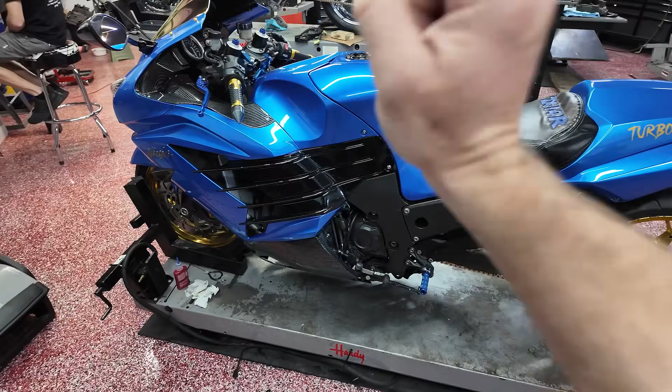We'll show you guys what it's sitting at currently, and that way we can show you guys the before and after, because again, he's already got some work done to the bike. I believe it's already been tuned. I don't know, I think he's got a Power Commander in there. I'll confirm all of this when we get it on the dyno and actually run through it. But right now, this is the bike, the way it's sitting, and I just wanted to show you guys in its depth so that when we get plugging away on it, when we finish it, you guys can get an overall view of how it's going to look whenever it's finished.

We are going to see what this factory fuel system can do. We're going to kind of push it to its limits, kind of see what it can do. Now, this guy's not looking for all the power in the world. He's already admitted to us, he doesn't want anything really crazy. This is more of an around town bike. He just wants a turbo street bike that's just fun to drive around. He's an older gentleman, it's not like he's 25 years old and he's trying to prove everything to the world.

So we have the ZX14R on the dyno. We're getting ready to baseline it, and we noticed a few things as we were just warming up the bike. He's got an active oil leak on the left-hand side, right by the header. We noticed a little bit of smoke coming out while we were warming it up, and we went over there. It's not a major ordeal. It looks like it's going to be from either the valve cover or one of the spark plug seals where the pair valve and the spark plug, there's a seal that goes in there, kind of like another gasket, and basically that looks like it's actively leaking, so it's burning a little bit of oil. But we just got done warming it up, so we're getting ready to do a 3-puller and get our good baseline down, so that way we can turbo this thing.

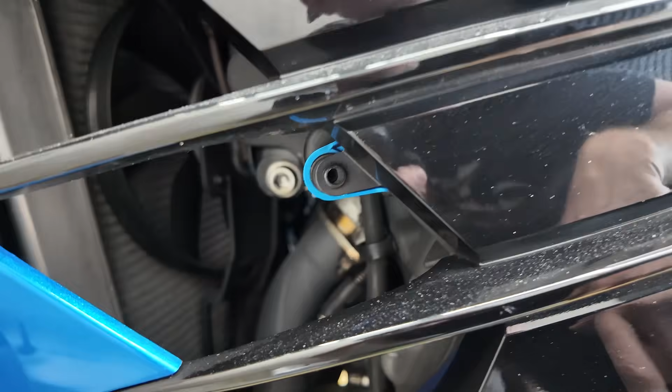Real quick, before we do this 3-puller, I just wanted to show you right there on that exhaust stud coming out from the head, that's where it's actively leaking. You can kind of see the buildup now, on the exhaust spring right there.

That's fresh oil coming out of the head, so it'll start to smoke here in just a little bit. That's kind of where one of the leaks is coming from. When we get this motor out, or at least stripped down, we're gonna dive a little deeper and see if there's anything else going on before we throw this turbo kit on. Last thing we want to do is pop a motor or have issues with this motor before it leaves.

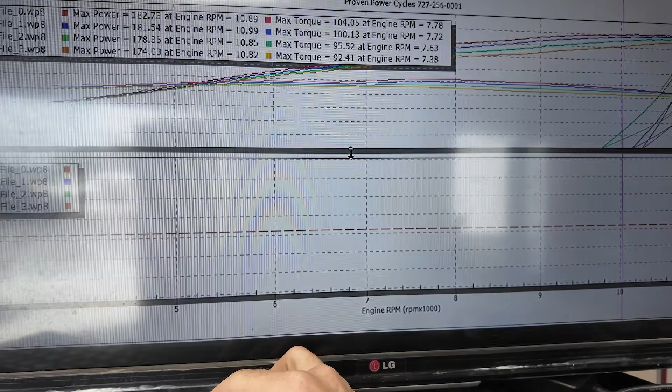Something interesting, guys. I wanted to show you this because this is exactly why I like to baseline bikes. This right here, well, not this exact reason, but one of the reasons. We didn't even get air fuel because quite honestly it's kind of irrelevant since we're gonna slap a turbo kit and redo all this. But look what happened.

Our baseline was 183, then we dropped down to 181, then we dropped down to 178, then we dropped down to 174. Notice how every time it was losing power. So red, blue, green, yellow, right?

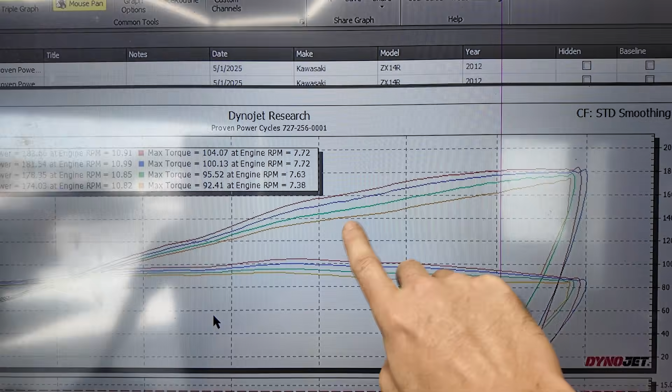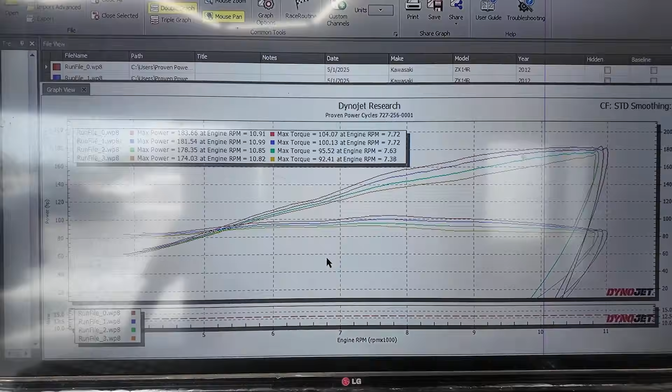This right here is an indication of either tire spin or we're having a clutch issue. I'm gonna lean towards the clutch issue because he's on a Shinko hookup, and a lot of times these Shinko hookups, they do not spin on the dyno. It's very hard to get them to spin on the dyno.

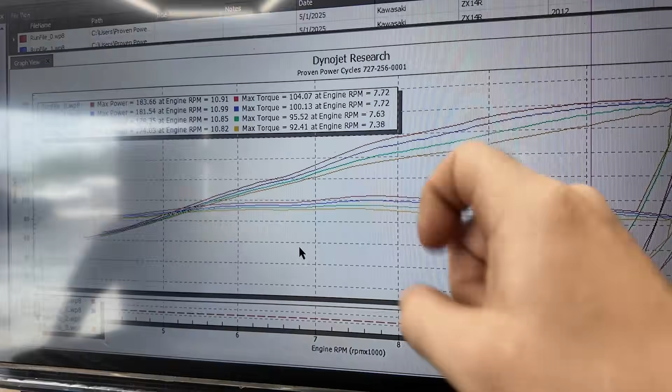Very soft compound tires. I was looking at the mile an hour on the speedo, and it was holding still even though the RPMs were wrapping up. Then it would catch and the mile an hour would jump. So again, that's kind of a clear indication that we're having a clutch slippage issue.

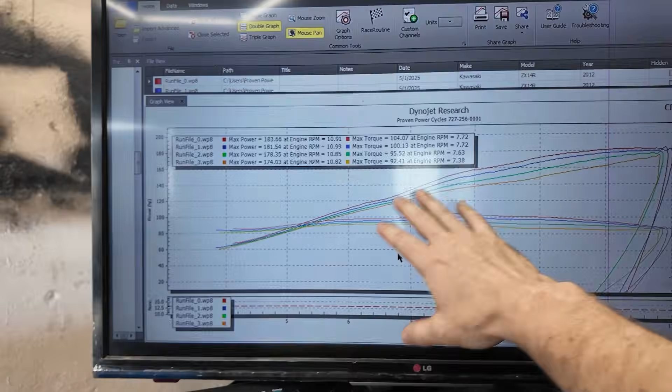So we're gonna have to go in. We might be replacing some fibers in here while we're going through and doing this whole turbo kit and all that jazz. So we got some things that we need to fix, and we're gonna do that while we're installing this turbo kit.

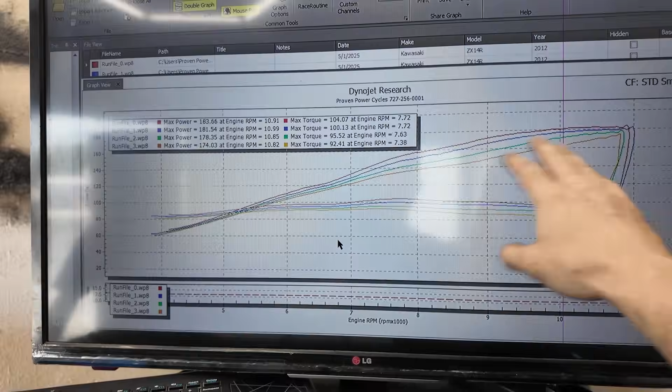But I wanted to show you guys this. This is exactly why I like to baseline the bikes, to see if there's any other issue going on before we start doing the work that we need to do.

So we're gonna get this thing off the dyno and start taking it apart. Lewis is gonna start going through this thing and kind of looking at all the things that we need to go through, and go from there. Start installing a turbo kit, dropping the motor, installing all the engine mods and everything while we're in there. And yeah, we're gonna go from there.

We're gonna make this thing badass. So we gotta make some whistling noises, make some expensive kazoo noises.

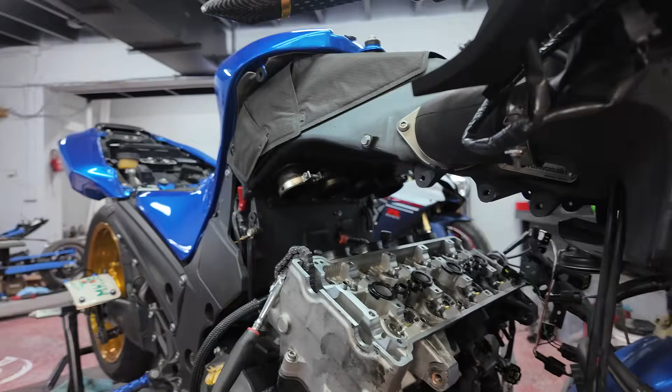All right guys, so Lewis had the cylinder head all off, and here we go. He got the Carpenter valve springs all in there. So we have 60-pound springs, and he's just reassembling everything with all the new gaskets.

He did end up needing a new timing chain. Where's that old timing chain? Right here.

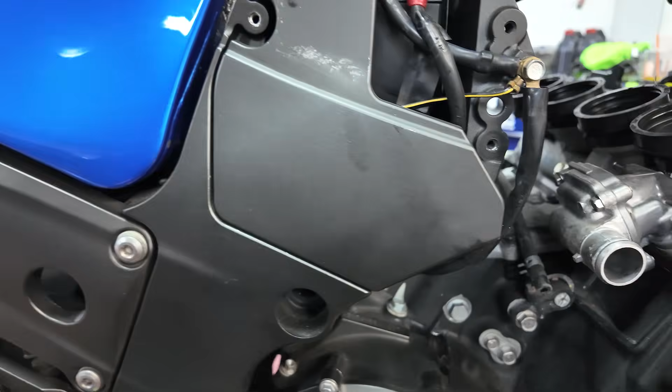So as some of you guys know, this is kind of a common issue with the ZX14Rs, but look at this timing chain. See how it's all kinked up? This is something very, very common with the ZX14Rs.

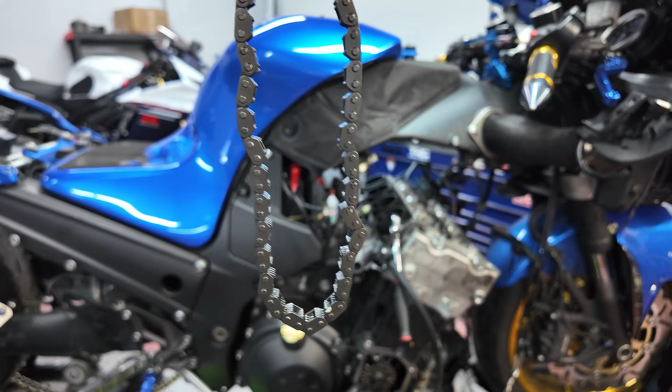So we opted to swap it out and just throw a new one in there so that it's nice and fresh. And the new one, as you guys can see, it's much more fluid, much newer. It's annoying 'cause it keeps falling.

Yeah, right, it's not supposed to be stiff. It's not supposed to have kinks, as you guys well know. Timing chain is supposed to be very fluid, supposed to be able to move freely, right? Like a wet noodle. So, but he got everything reassembled.

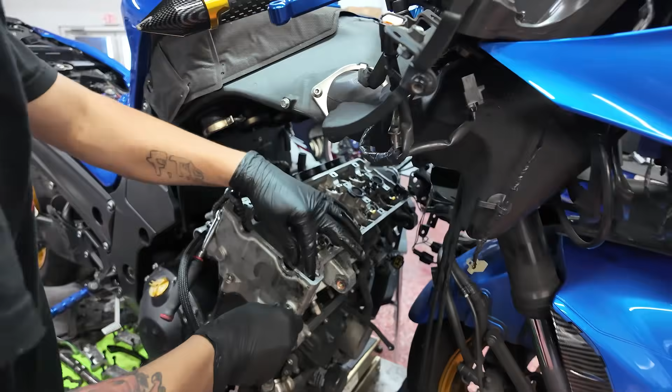We got a new gasket. Like I said, we got a new head gasket in there. We got new seals, everything is all brand new in there. So this thing's getting basically a refresh and top end, more or less.

So that way when we put it all back together, it will be able to take the boost and not have any valve float or valve drop, anything like that. So we want to obviously prevent all of that.

Once he gets done with the engine stuff, we're gonna do the oiling mods, and I do want to look at the clutch because something was slipping on the dyno, either the clutch or the tire, but my gut is telling me it was the clutch. So we might be replacing a clutch, we don't know yet.

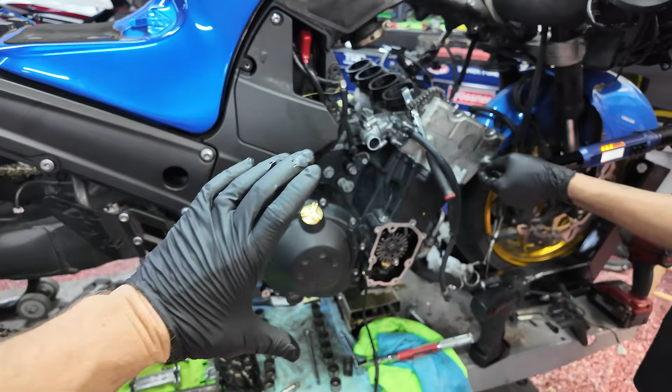Once we start getting to that point, we start digging into it, we're gonna look at the plates, measure them, and see where we're at with the thickness and everything like that, and kind of go from there as we're looking into the oil mods, to do the oil mods.

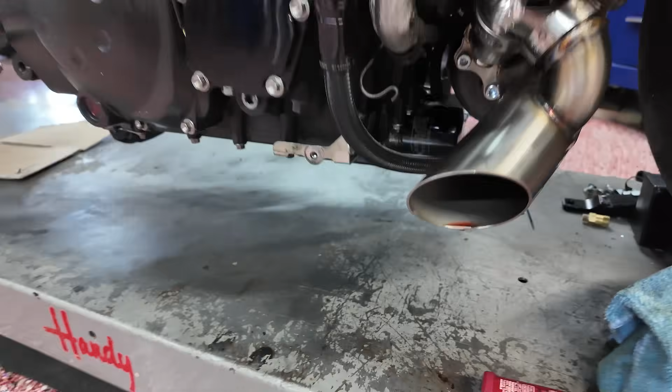All right guys, we got the Turbo ZX14 all squared away. Lewis is putting in the last bolt here for this cover, and I'll go over that real quickly. As the bike was coming together, as the turbo kit was coming together, we'll show you real quick, we got a little bit of oil residue right here on the exhaust, okay?

What ended up happening with this bike is Lewis got it out, took it outside, fired it up, and we started having oil and smoke coming out of the turbo, out of the exhaust. So I've been through quite a few of these builds, and I'm like, all right, let's start looking at the oil feed and the oil drain setup, and let's see what's going on with it.

So we went ahead and started going through it. We noticed there were a couple little minor things that were like, all right, let's fix this, let's fix this, let's fix this. In fairness, I kind of threw Lewis to the wolves here, and basically just had him do about 99.9% of this on his own, and let him kind of figure it all out.

Yeah, no clue what the fuck I'm doing.

So in fairness, like I said, I did throw him to the wolves, and I just kind of let him take the reins on it and let him do it. Make the mistakes, you know, let him go through the process of it and go, all right, here's what went wrong.

So I was able to help with some of the things. Now, interestingly enough, even the minor things that were wrong, again, these were minor issues. It was like, all right, let's change this, right? Those minor issues got resolved.

Well, we went to go fire the bike back up, and it was still pissing out oil and smoke. So then it became a real head scratcher where it's like, all right, something is not right.

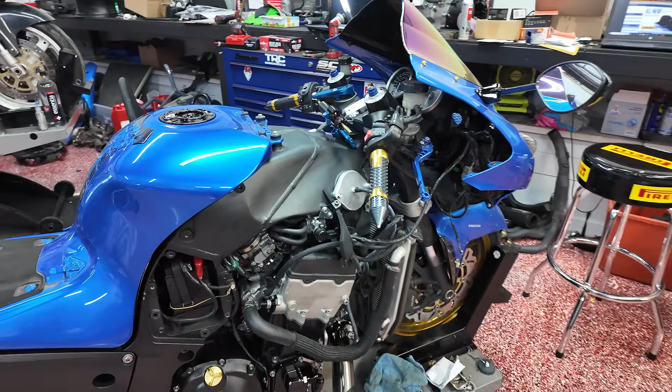This is gonna be one of the bikes that's gonna go on the dyno here very soon. Once we get to that point, we're gonna pull this thing outside, triple, quadruple check everything, make sure it's running good, make sure the coolant's nice and bled, everything is cooling down and operating the way it should. Then it's gonna go on the dyno, making sure the heat up stages are good, that it's not smoking anymore. Once we're all good to go, the bike will see the dyno, and we'll start going through the tuning process here real soon.

All right guys, so we got the Turbo 14 on the dyno. Now again, this is our stage 1 kit. We are going to go over the numbers again with you guys really quickly. Here is the bike all turboed out. We will get it fired up here in just a little bit. I just got done doing the readout on the ECU. This was a Schnitz flashed ECU.

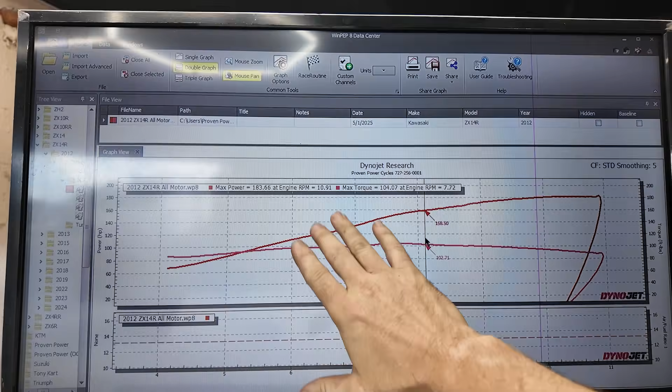Curve looks great. We did not get an air-fuel ratio because we knew we were gonna tune it anyway, we knew we were gonna throw it on the dyno. So we didn't get an air-fuel, but that's not a big deal. The bike made 183, which is actually, I know some of you guys out there are gonna scoff at it or make fun of it. Mine made 247 on pump gas.

But let's keep in mind, it was a stock motor. Now it has very mild upgrades in the motor. We did upgraded valve springs, new head gasket, things like that. We replaced some things in the motor, but we didn't really do anything to make more power. We just did it to make it more reliable and safe, like the oiling mods. It's got clutch mods now, or it had clutch mods, but we did the oiling mods.

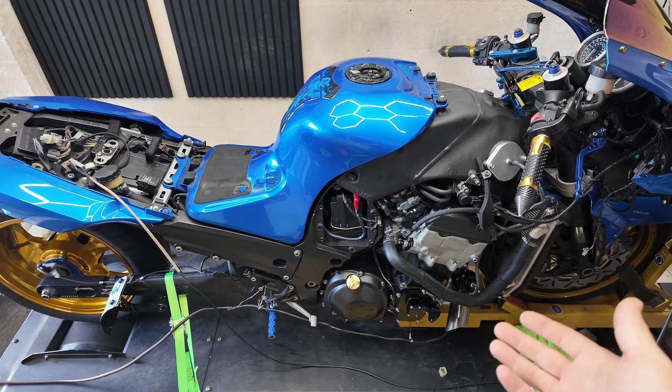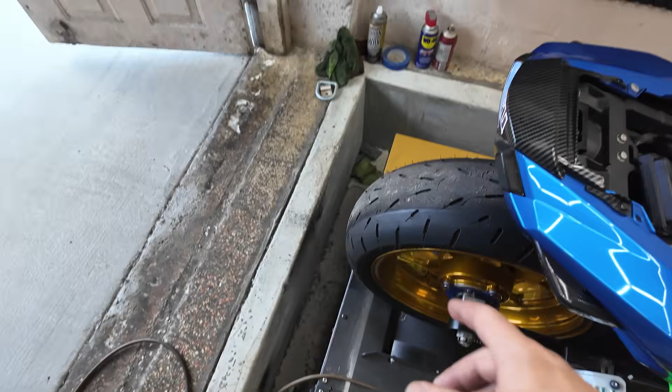So now, going back to the power numbers though, this bike has like a 10-inch stretch on it. This thing's probably sitting at, I don't know, 68, 69-inch wheelbase. It's pretty long for a street bike. And not only that, but he's also on this Shinko hookup tire, so this hookup is gonna rob a ton of power on the dyno, okay.

So for those of you guys who are on like a stock wheelbase with a full exhaust system and all that jazz, you're gonna make more power even with less mods, just because you don't have a sticky tire that's really holding power back, and you're also not stretched. The further out you go, the more horsepower you're gonna lose with that stretch. And again, this one's pretty far out. He's losing a good 15 to probably 17 horsepower from the stretch, all right.

Normally on these bikes, on a Stage 1 turbo kit, on a stock wheelbase bike, we make about 260 wheel horsepower once all the tuning is said and done. And that's on 4 pounds of boost on a Gen 2 ZX14R, as long as everything is mechanically sound. Now this one, given the numbers, 17 wheel less, you're talking about 247 or so, 245. So if we can get him to 250, we did our job and we did it well. If we can get him to 245, anywhere from 245 to 249, he's right in range with where he needs to be, all right. And that's if we have no tire spin, stuff like that.

So as we run this bike and as that tire gets sticky, it's gonna get hot and very, very sticky, and that's gonna take away more power, things like that. So we gotta kind of make it quick. That's kind of why I might finish the tune tomorrow when I get in, just so we can have a nice fresh tire and get a real horsepower number on the 4-pound springs. But other than that, I'm gonna go ahead and finish up this process so I can get access to the ECU, and we're gonna start tuning this thing and see what we can make out of it, all right.

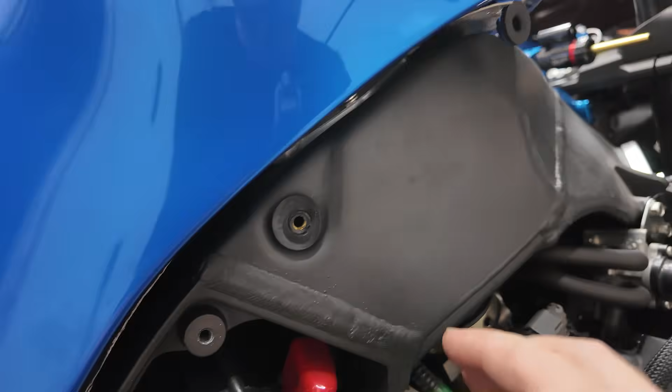Because the airbox is the frame, these bolts need to be in it, let me get around that. So it's getting later in the day, everyone's gone. I contacted our tech. We actually have replacement little grommets here, the rivnuts, the rubber rivnuts.

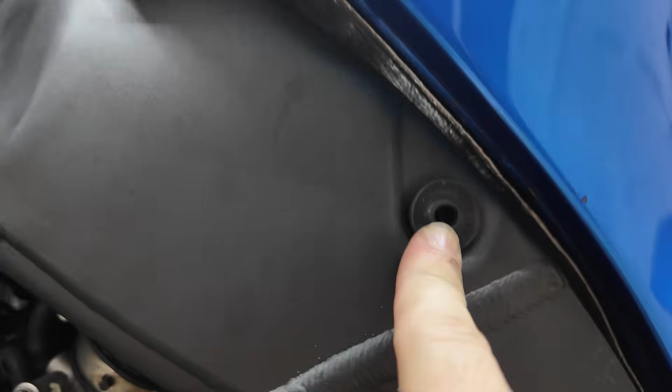So this one's okay, I just needed a bolt to fill it, which I'm gonna do. And we have another one here on this side. This one's missing, it looks like the inside. Oh no, I see it, it's in there, but it's all kind of messed up. So if anything, we're gonna take this out, we're gonna replace this and put new ones in. But either way, we need to have the bolts that go in here.

I don't know where this gentleman's bolt kit is. I tried to call the tech, he ended up not picking up. I called Lewis, he didn't pick up. So it's getting late in the day. So it's okay, it is what it is.

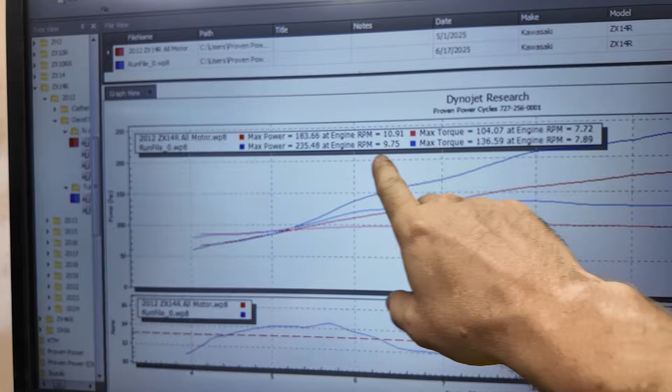But so far, even with the minor boost leaks that we have, we still produce, again this is the very first run, we made 235 wheel with 136 pound-foot of torque. We have a very conservative tune in there, 10.97 at the big end. We're gonna lean that out a little bit more.

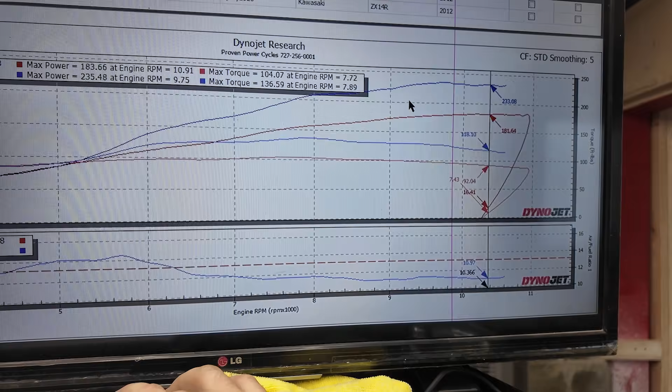I put some parameters in there to kind of keep everything safe. But look at these gains, 181 to 233. We're picking up about 50 wheel horsepower gain there, a little bit more than 50. It's about 56 wheel gain. Again, about 60 horsepower, that's pretty impressive.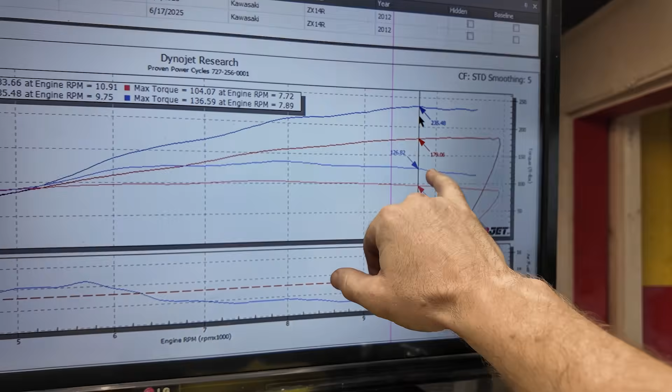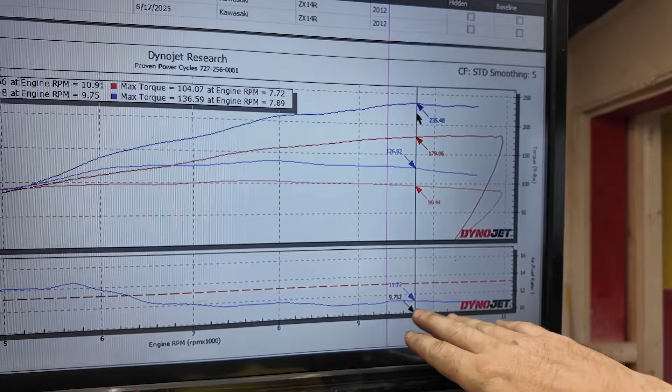Here we have, let's say 180 to 235, again about 55 to 56 wheel horsepower gains here. So massive gains already, even with a minor boost leak. And again, we're running it ultra safe. I mean, we could run this AFR a little bit leaner if we wanted to.

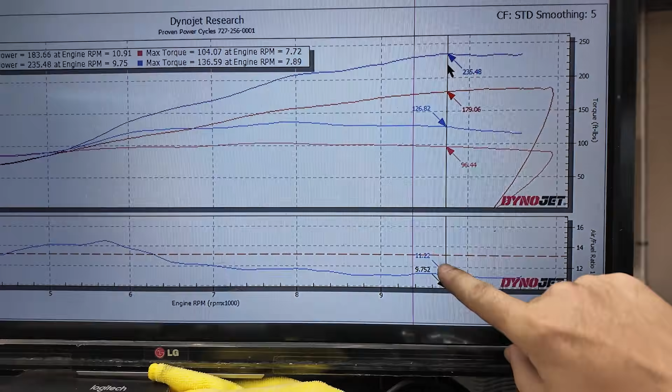This is just the baseline pull, this is our base map, all right? Base map, base map. Now let me say something real quick. I'm not gonna alter the map yet because we have a boost leak. Once we fix that boost leak, this number should lean out and the horsepower should jump up a little bit more.

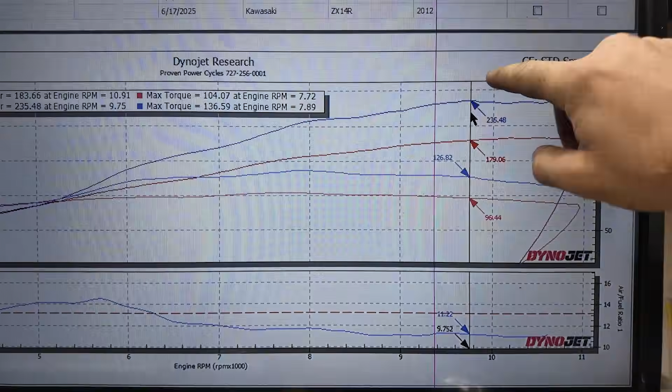We're not leaking a ton of boost, it's not like we have a massive major boost leak, but we definitely have a boost leak and we're en route to making that 245 wheel, like I said, what we would hope to get. So if we can get anything above that, great. But ultimately, I'd love to see around 240 to 245 horsepower.

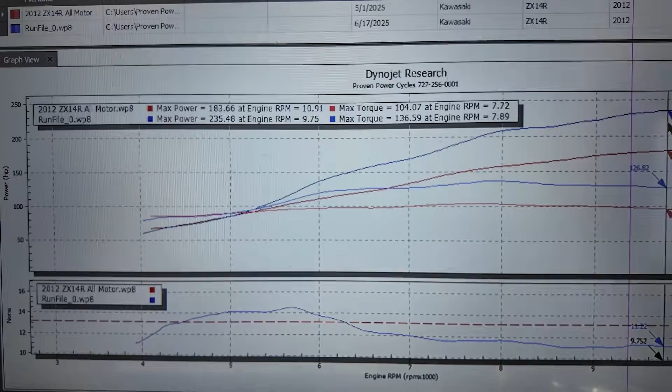So we're gonna throw some bolts in here tomorrow. It's running later in the day now, I gotta shut it down. So we're gonna throw some bolts in there, get this boost level up a little bit more, clean up the tune, and then we're gonna send it. So yeah, not bad so far.

All right guys, so it's the following morning. We got the bike all started up, we got it warmed up, and we got the bolts in the grommets now, or in the rivnuts. So we're gonna go ahead and do another pull here, and then we'll go ahead and make some changes to the tune. But I just want to make sure now that we have the little boost leaks resolved, that everything looks good on the air fuel and all that before we make some changes. So we're going to go ahead, get this set up, and do some runs.

So we got that ZX14R, we got it all wrapped up. I'm still standing on the dyno with it, but I just wanted to show you, this is where we're gonna end at. It's a super conservative tune. We got some timing pulled out, you know, we got it richened up.

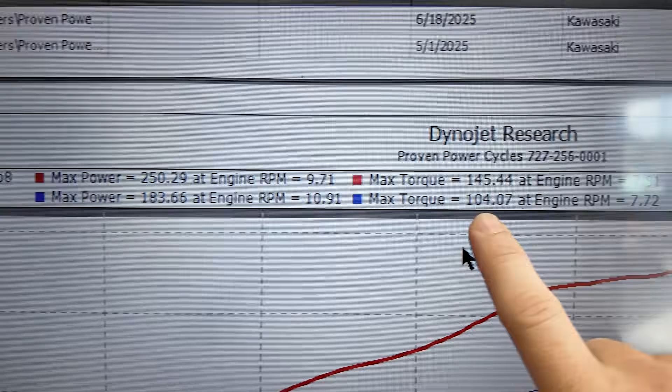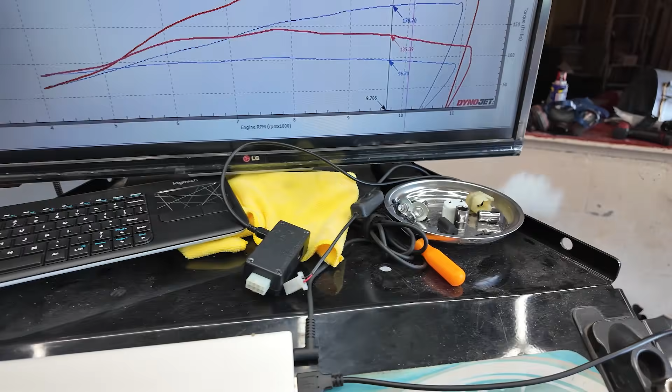This is how we came in, making 183 wheel horsepower with 104 pound-foot of torque. This was all motor, guys - a stock motor with the stretch, with the Shinko hookup, basically as it sits just like this. We're gonna clean this all up before he leaves, but this is how the bike came in set up like this. We didn't change any of the chassis setup, chain, or gearing. All we did was the Stage 1 turbo kit with a few of the other little mods we do, and that's really it.

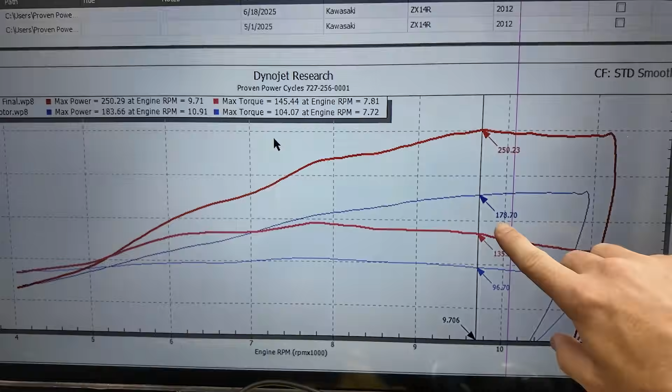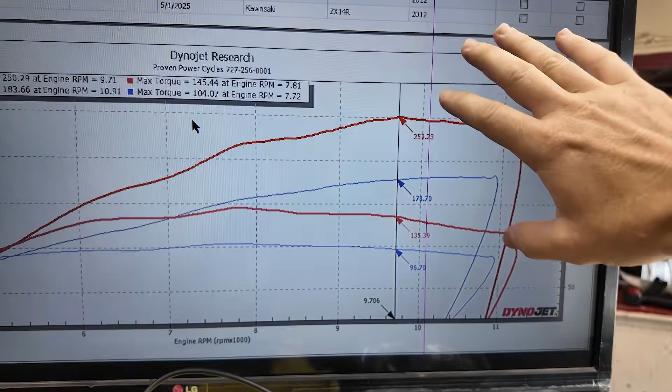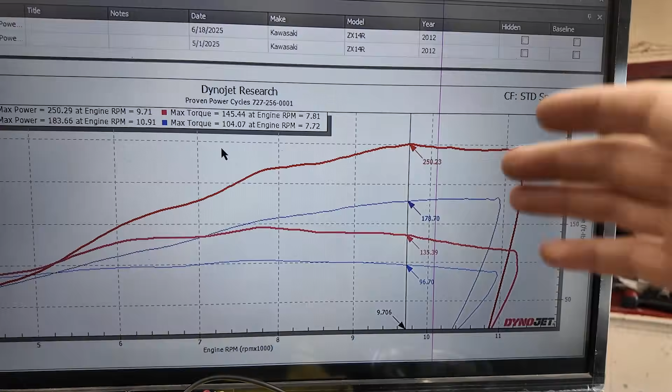At top end here, at 9,700 RPM, we went from 178 to 250 wheel horsepower, which is a 72 wheel horsepower gain - absolutely monumental for this bike. And then our wheel torque, we went from 96 pound-foot to 135, so roughly 39 pound-foot of torque gain. Again guys, just insane gains on this bike.

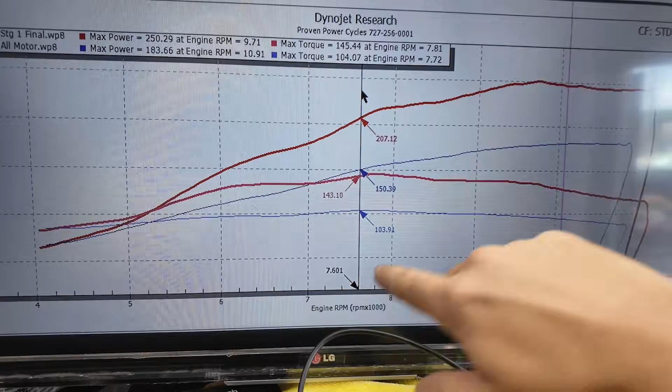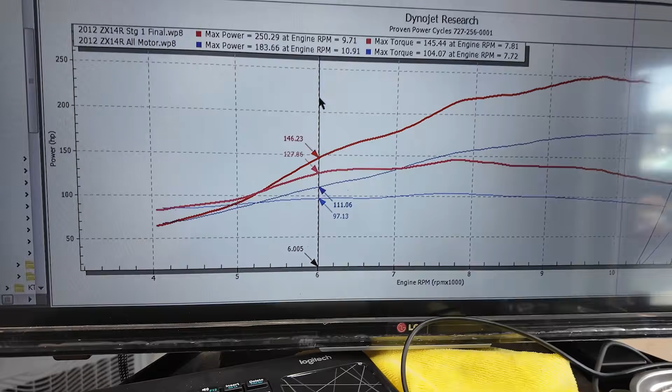Now that's at the top end. We can pick a lower point here - we're still at 57 wheel horsepower gain at 7,600 RPM. And the wheel torque, we're about 40 pound-foot of wheel torque gain. This 111 to 146, we're at 35 wheel gain there, roughly the same on torque. Just insane amount of gain across the board.

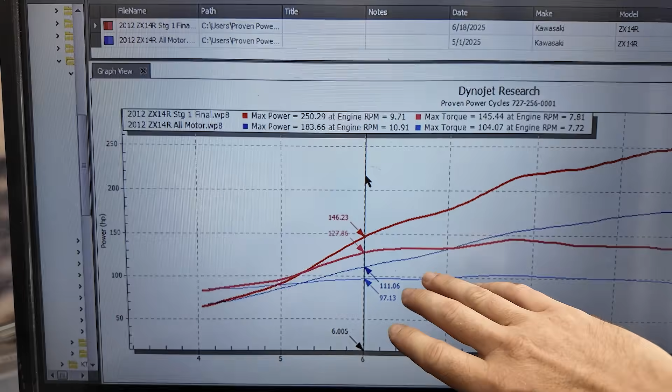Now again, this is our Stage 1 kit. We ended at 250, but remember, we typically end around 260 wheel horsepower with these bikes. With this bike being stretched and the Shinko hookup on it, we're taking a lot of power away - probably easily 10 horsepower, I'd guesstimate closer to 15 to 17 wheel loss based on the stretch and the tires. So given that we still made 250 wheel, that's gonna put us around 260 on the low end to about 267 on the high end.

And this is on pump gas, guys - this is on a 93 pump gas tune. This is not anything special, straight out of the pump. Nothing crazy going on.

If you guys are interested in our Stage 1, we got these things down like a science. Again, this took 4 or 5 pulls to get it down and get it mapped out. We got this game down pretty stout.

Our Stage 2 kit, that one we're still getting figured out on the Max Mini. I know a lot of you guys have been asking about it - we're still getting through it. The tuning portion of it is phenomenal, we're having a slight issue with keeping the idle consistent, and that's it. But we're working on that currently, just to let you guys know, and we should have a solution very soon because we are gung-ho about it. We're trying to get it wrapped up for this other customer - it's a badass build, we're really enjoying it.